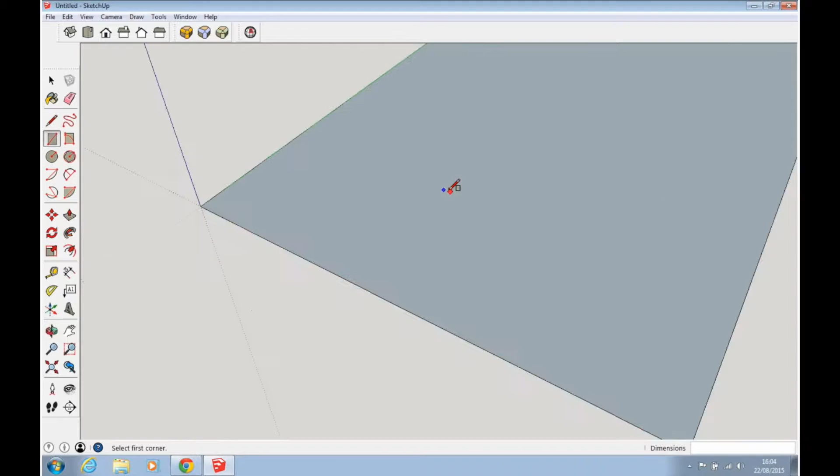I'm going to zoom out, holding down the shift key and using the middle mouse button to pan - scroll wheel, shift, middle mouse, pan. I'm going to scroll right out until I get the profile of the box, and you can see that's going to be 75 millimeters in that dimension and 50 millimeters in that dimension.

Now the base of the box I'm going to make roughly 15 millimeters. To do that, I'm going to choose this tool here, the push-pull tool, and with that face already selected, I'm going to click and drag up.

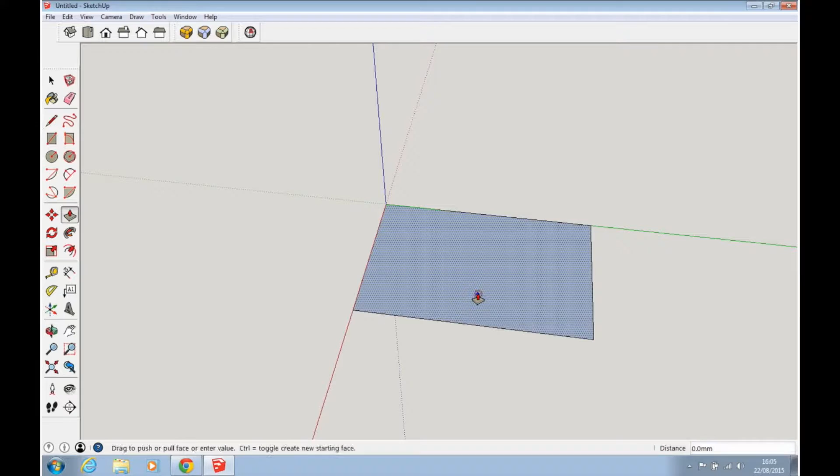I don't have to be too precise here. I can let go and then start typing 15000, and you can see the box snaps to that dimension.

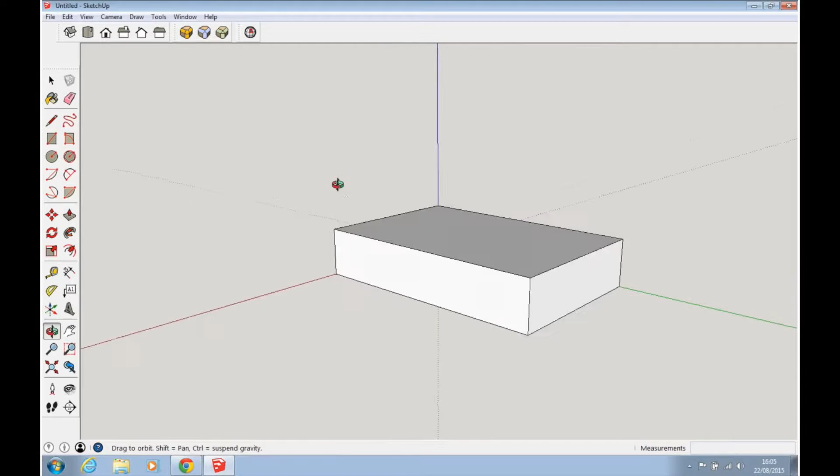Now, I did say we're not going to make just a simple box. What we're going to do is apply some nice curves to it. So the next thing to do is draw some guidelines, because we need precise dimensions for the curves. You don't have to, it's not essential, but I like to do that sort of thing.

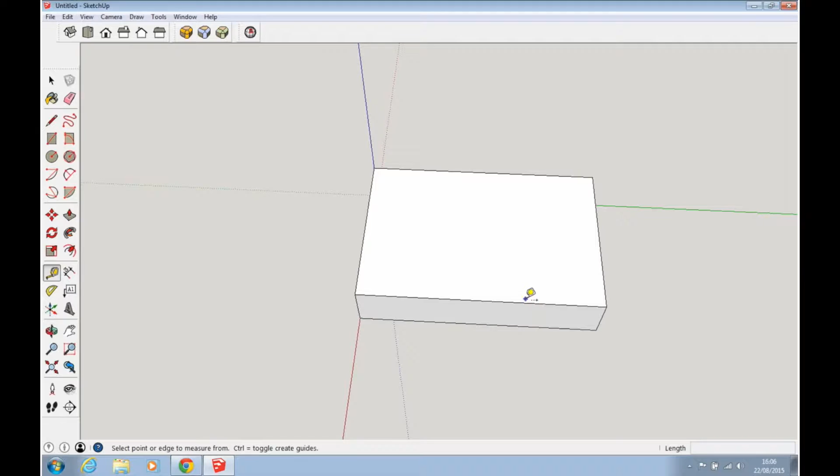So what we're going to do is choose the measurement tool, which is this little tape measure. It doesn't matter which edge I start from, you see the cursor snaps to the edge as I move around here. So I'm going to start at this edge and just drag up.

And again, I'm going to type in a value. It's 1 centimeter is the radius I'm going to use, which is 10,000 units. And you'll see that that snaps there.

Now, actually, that's probably all I need to do to give it a reference point, because all SketchUp needs is a reference point to work from.

I'm going to go to the 2-point arc tool, click on that, and what will happen now is I'll start with this, where this guideline meets the edge, and it tells me there's an intersection there. Now I click once and you'll see automatically this tool paints or draws it in a cyan colour. It's basically saying that it's a tangent to that edge where the red X is.

If I then move on to the opposite edge, that's at 90 degrees, and then move up, you'll see that it snaps and goes magenta. That's basically telling me that's tangent to that edge. I can change that - I don't have to draw a tangent edge, but I think that's what we're going to go for. I'll go for the tangent edge.

So once that's ready, I'm going to click to set it. Another wee interesting fact about this tool is that when you choose to use it, I'm going to come away from it and go back to the pointer. If I choose it again, if you look down at the measurements, it changes to sides.

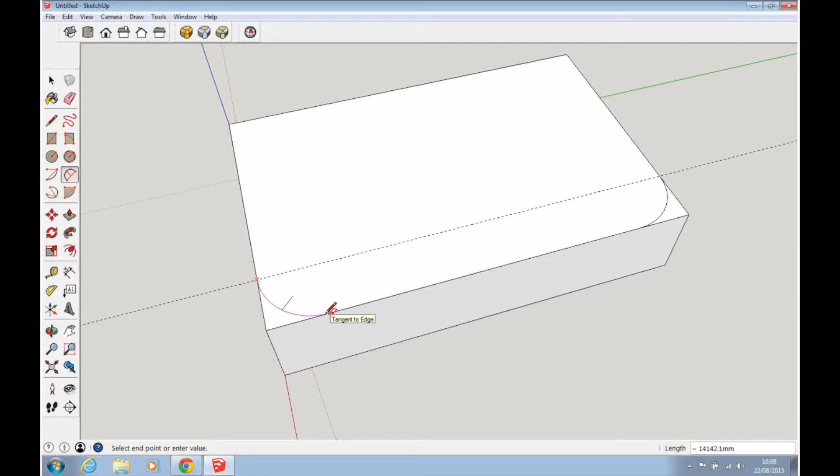So again, I'm going to click where it intersects, drag along, snap at magenta, and then click again. And I've drawn 2 curves. Now I don't have any guidelines set up on the opposite side.

What I can do is use SketchUp's inference engine, so I'm going to use that. You see that the curve tool snaps to the vertex that's created at the tangent. And if I just move along there, you see the dotted line.

Red dotted line means I'm moving along the x-axis. And it'll snap where that meets the other edge, and then I can click with the tool, and it's exactly the same again. It'll snap in.

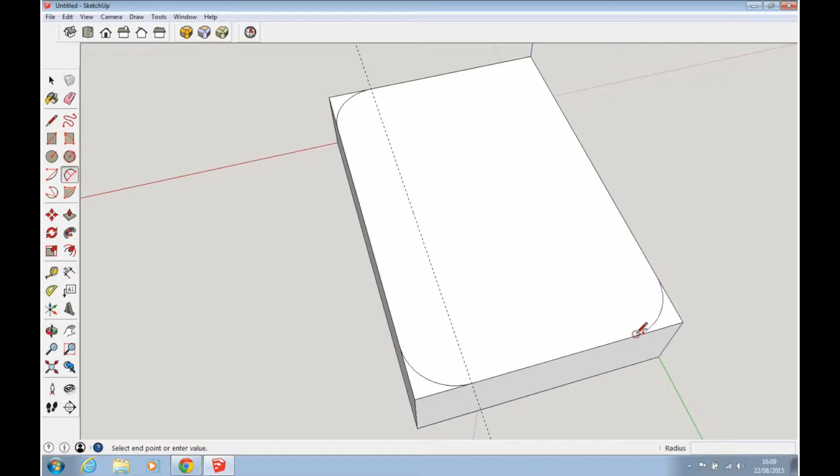Okay, now I'm clicking 3 times. First time to set the start position, second time to set the end position, and the third time to set the arc. I'm going to repeat that trick this side.

So where my cursor is up here, let it hover over that for a moment, and then drag it down. You'll see that it's aligned with the x-axis until it meets that edge there. Click once, click twice, and then click again to set it.

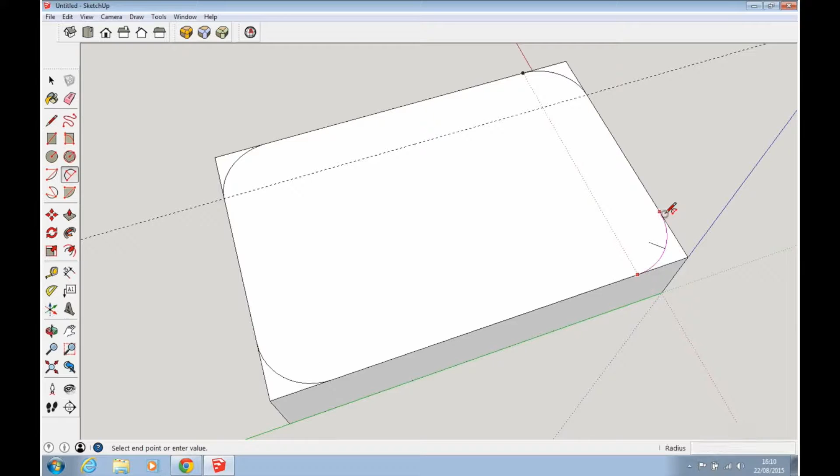Okay, now we've not actually created any curves yet, or curved edges. We've still got these right angle edges. So I'm going to use the push pull tool here. As you see as I use this, it highlights the faces as I move around the object.

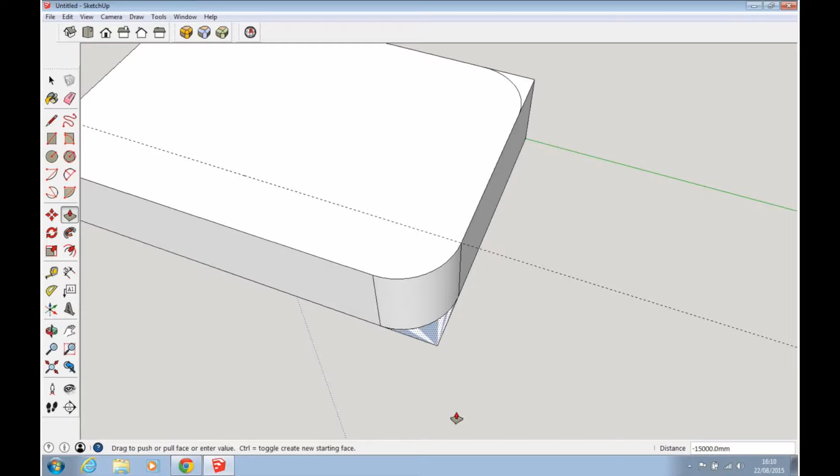I'm going to use it on this face here, because putting that arc in has intersected the rectangular face and created a separate entity. That can be dragged down like so, and it won't go beyond. I can drag further, but it won't go beyond. If I let go of the mouse, it erases that extra face at the bottom.

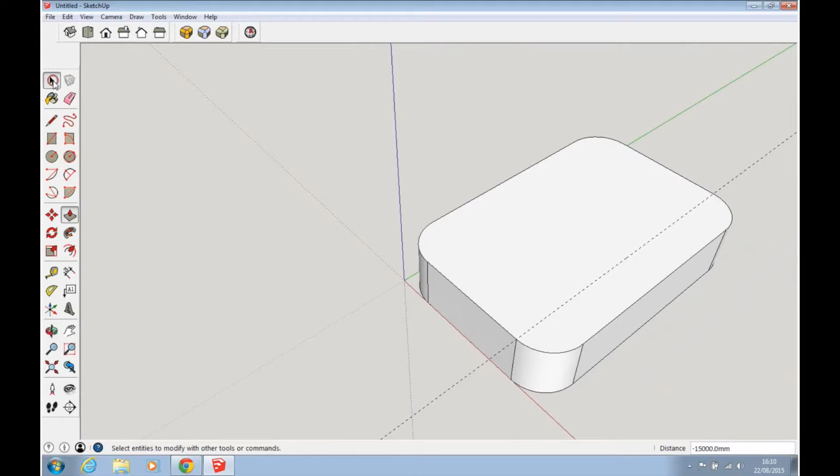And I'm going to do exactly the same here, here, oh, and here. And you can see our box is starting to take shape now. I'm going to do some further refinements to it. But for the moment, I'm quite happy with this shape.

So the next thing I'm going to do is carve out the interior. There's a couple of things we can do here. We're going to need to decide the thickness of the walls of the box.

Now, if you choose to print it in, for example, laser sintered nylon, it goes from very flimsy to quite sturdy in a short space of thickness. So a good thickness I've found is something like 1.8 millimeters. For this size of box, it's probably enough. You don't want to make it too thick. You could make it thicker, but it's going to cost you more at the end of the day.

So 1.8 millimeters. In order to do that, first of all, I'm going to use the eraser tool and just get rid of that guideline. Don't need that anymore. I'm going to click on this top face, and then I'm going to choose the offset tool, which is this here. And the offset tool kind of sticks to the nearest edge on the face that you just selected.

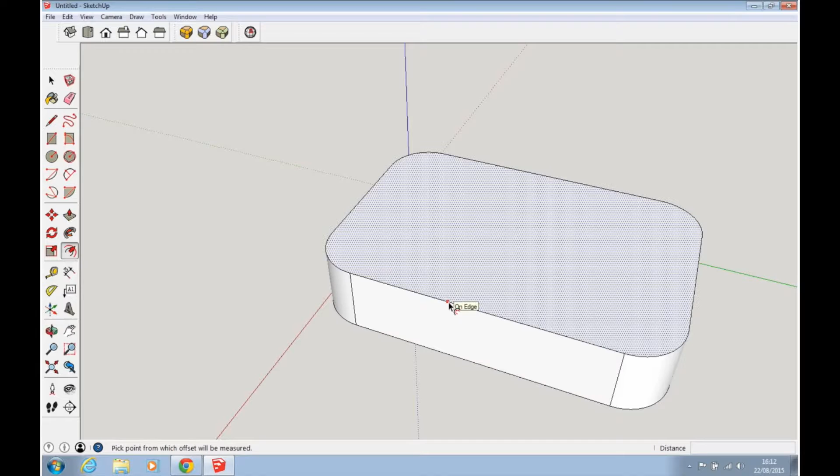I don't have to be too particular about this, but if I click once and start dragging it, I've just clicked, move the mouse in. You can see it follows the contours of the curve quite nicely until it gets a bit screwy as you move in, which is undesirable.

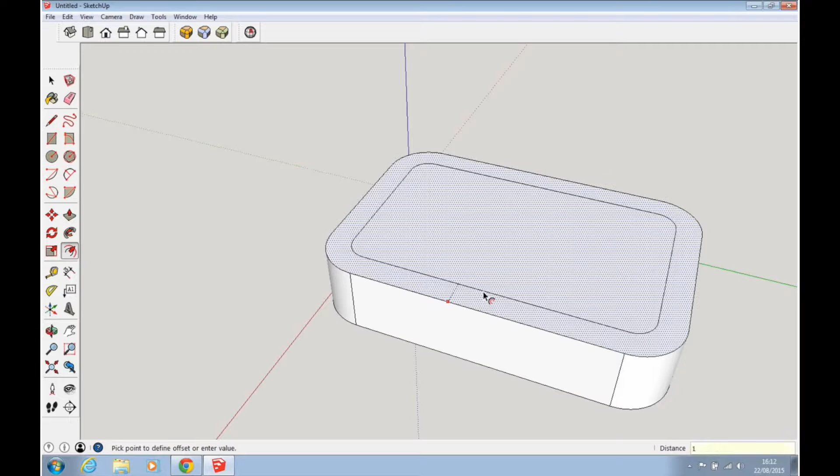However, we're not going to go that far, we just want 1.8 millimeters. So again, I don't have to do anything, I just have to type 1800. Remember, we're multiplying by 1000. Hit return. And we get a nice smooth wall.

Now, how do I make the base 1.8 millimeters? How do I know to make the base? Well, what I'm going to do is draw a guideline, and I'm going to start the guide on the bottom edge, click once, and then pull up, and you'll see that the blue arrow indicates I'm on the Z axis when I'm moving.

The line up and down. And again, I just type 1800 to represent 1.8 millimeters.

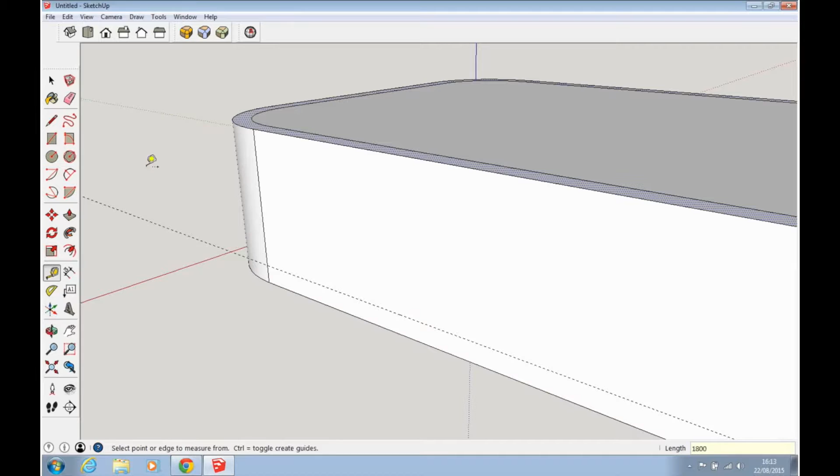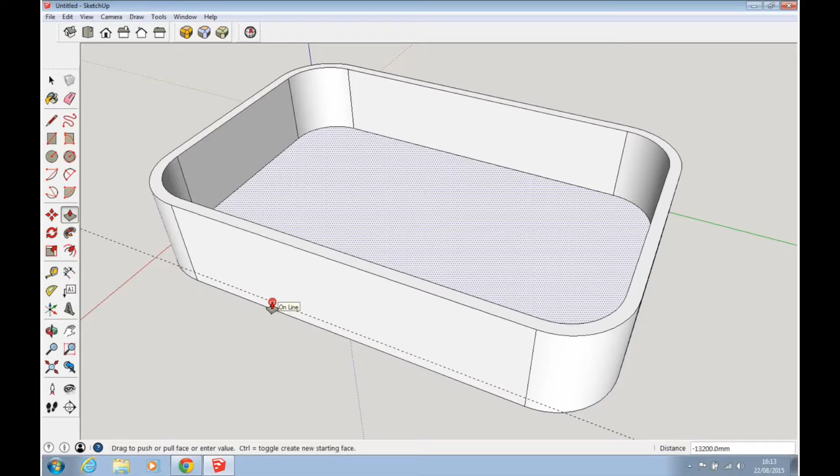Okay, now with that guide in place, all I need to do is select that face, choose the push pull, and then move the face down, and it pushes that in. And then what will happen is if I drag my cursor over the guide, the face will snap to the line, and I know that that face is 1.8 millimeters above that face.

Okay. Use the erase tool to get rid of the guide. Okay. Now, what I'd like to do is...

That's going to produce a box, yes, and it's going to have curved corners, but it'd be really cool if it was curved on the inside. So what we're going to do now is create an inside chamfer.

And the easiest way to do that is just to create some guide geometry inside the inside face. And I think we're going to make the inside chamfer about 1.5 millimeter radius.

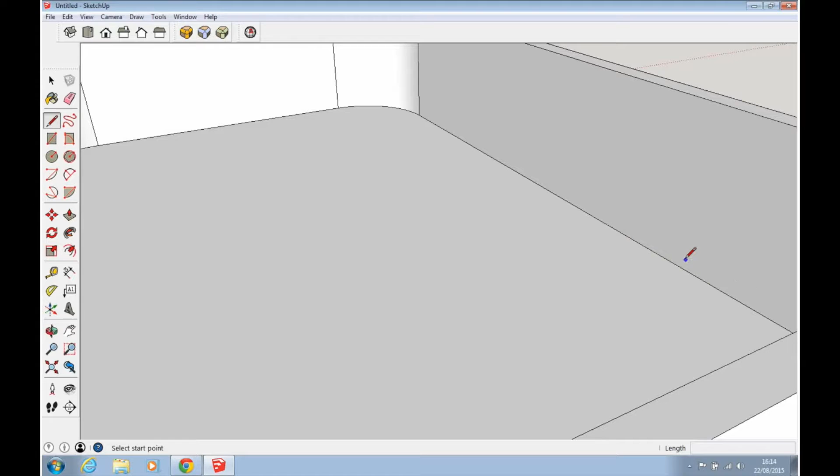So in order to do that, I'm going to choose the pencil tool, and I'm going to click it. It doesn't have to be, it can be anywhere on the line. If you move up the line, you'll see it snaps to the center of the line at some point. There you go, midpoint. So we'll work from the midpoint, and again we'll move up, and again we're going to type 1500 to represent 1.5 millimeters.

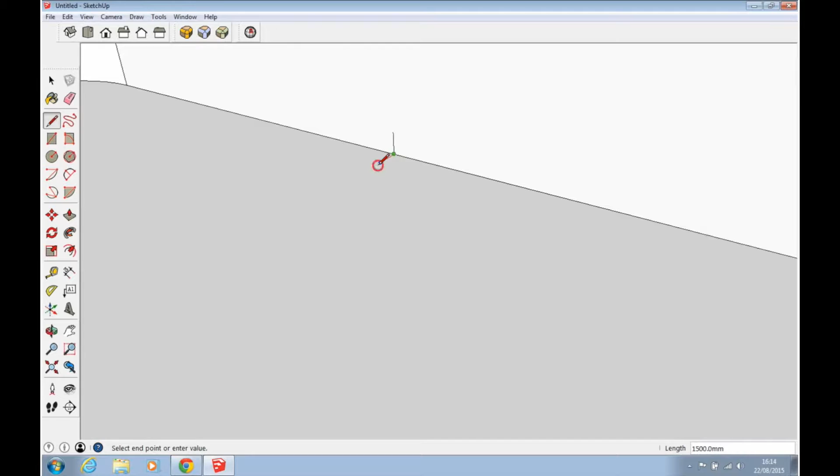So I'm going to move to the bottom of that line, click again, and drag along. You see that SketchUp snaps to 1500 - it knows you're going to use that as the measurement, so it snaps to it. So I don't have to type anything in, just click, then choose the pencil tool. Make sure the line looks right.

That's good. What I'm going to do now is draw another arc, but this time I don't want so many faces on it - just 6 faces, 6 edges, 6 facets. So before I do anything, I'm going to type a 6 in. You'll see that down at the bottom it changes to 6. Hit return, and then I can start drawing my arc.

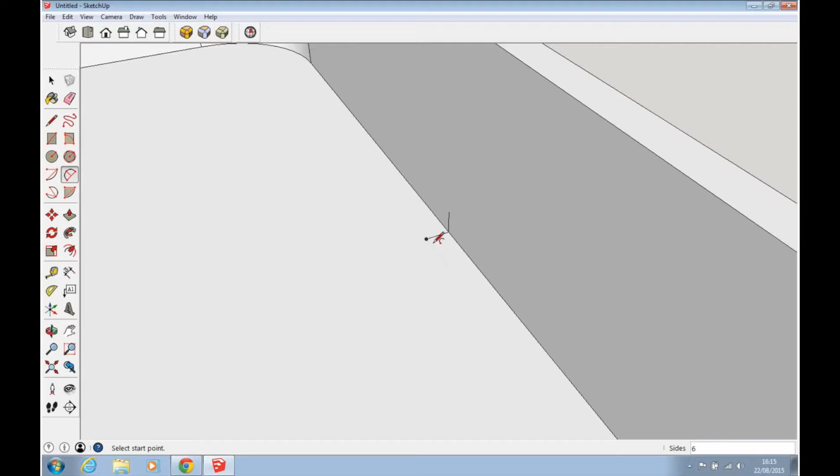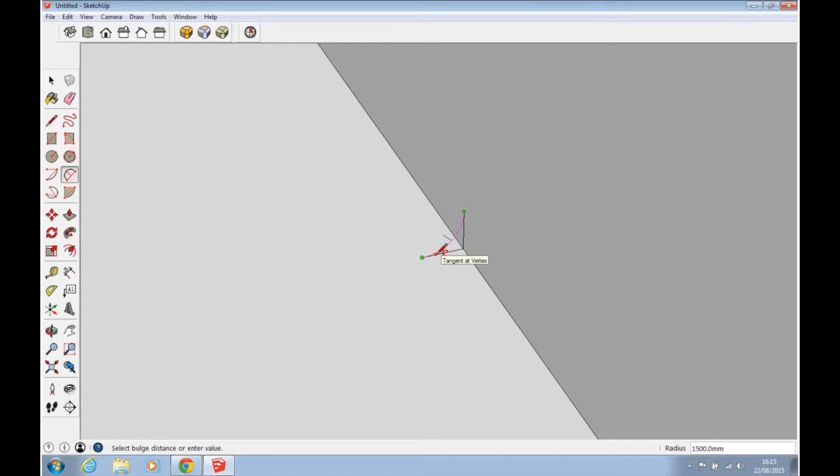So I'm going to choose to draw the start at the top, start to finish at this vertex here, and then drag inwards. You'll see that if I drag in on this bottom edge, it goes magenta to represent tangent, and if I click again, it creates a little face which is the shape of the arc.

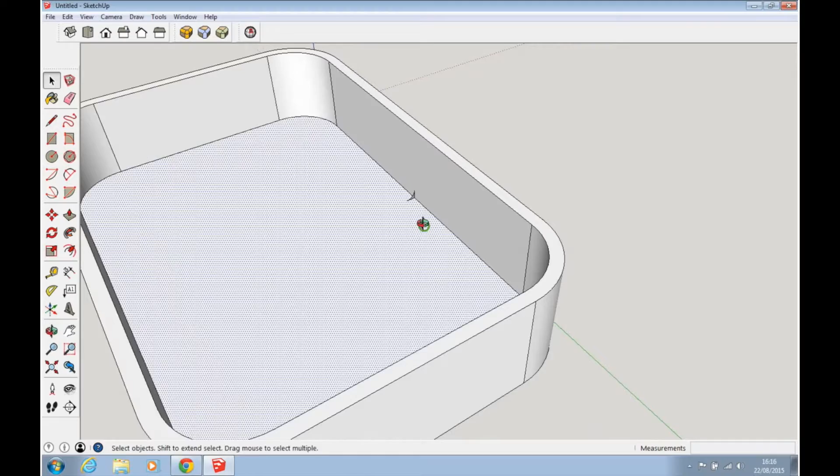Now we can use this to our advantage, because we can select the entire face here - it's the base of the inside of the box. By choosing that face I'm telling SketchUp that I actually want to use the edges when I go to the next tool, and the next tool is going to be the Follow Me tool.

So the Follow Me tool is a bit tricky to get to grips with, but I'm essentially just telling SketchUp beforehand, before I start using the tool, that this is the face I want to work with.

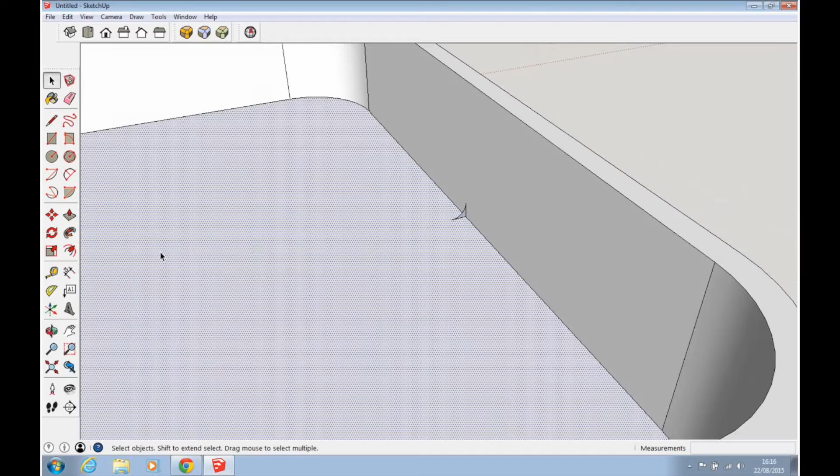So after I click this, I need to choose a profile. Well, I've just created the profile, and the profile is this profile here. So if I zoom in on that and then click, it creates a nice chamfered edge, and it follows the curves around in the inside, which is really nice.

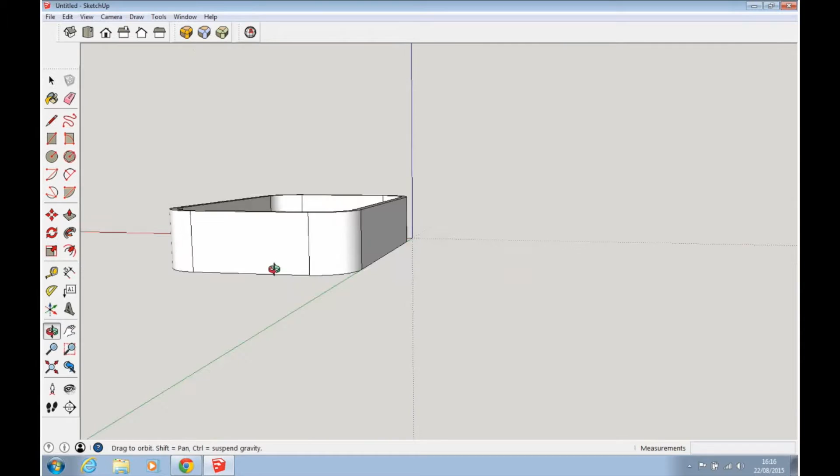Now, what I'd like to do is do the same on the outside. However, that does present us with a little problem - we can't actually see any rectangular faces to draw from.

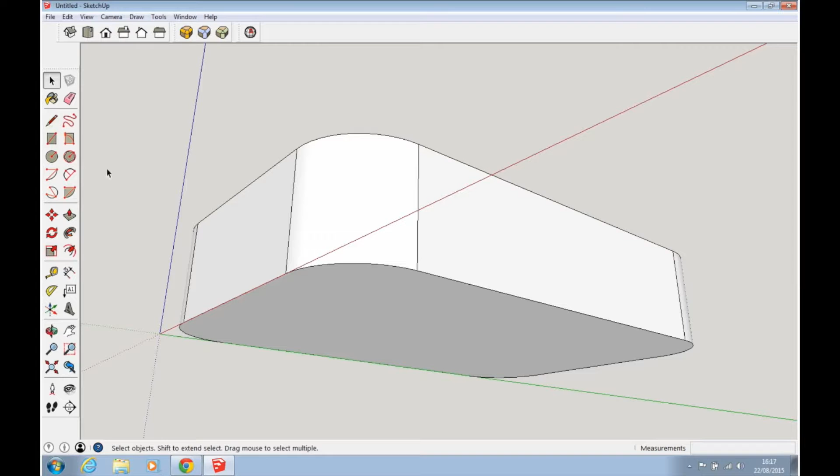But what I can do is pull a similar trick. So if we want a continuous 1.8mm thickness on the radius, then we need to add 1.5 to 1.8 to arrive at a new radius. So that would be 3.3. So I'm going to put a 3.3mm radius on the outside of the box here.

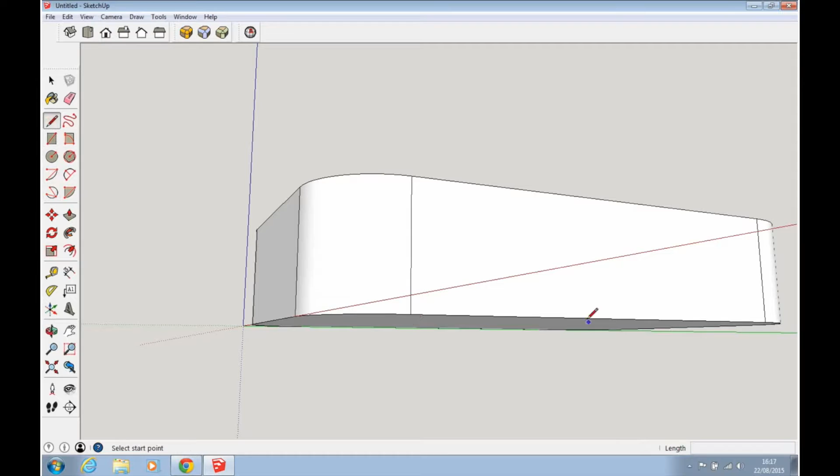So in order to do that, we're going to use this tool again - pencil tool, midpoint, and then draw up. I'm not drawing this, it snaps to 1500. Well, we're not going to do that. We're going to add on 1.8m to that, so I'm just going to type in the value, which is 3300, and it draws a line up there.

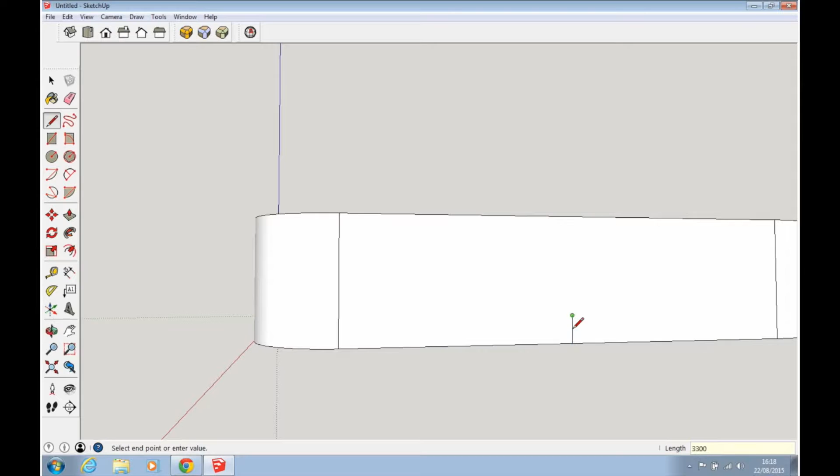Now the pencil tool is still attached here. Well, that's not good to me, so I'm going to press escape to detach that, and then start again at the bottom, and draw along the x-axis, the red axis, the same again - and there it has snapped to 3300 units there. Now again, got this line, escape to get rid of that.

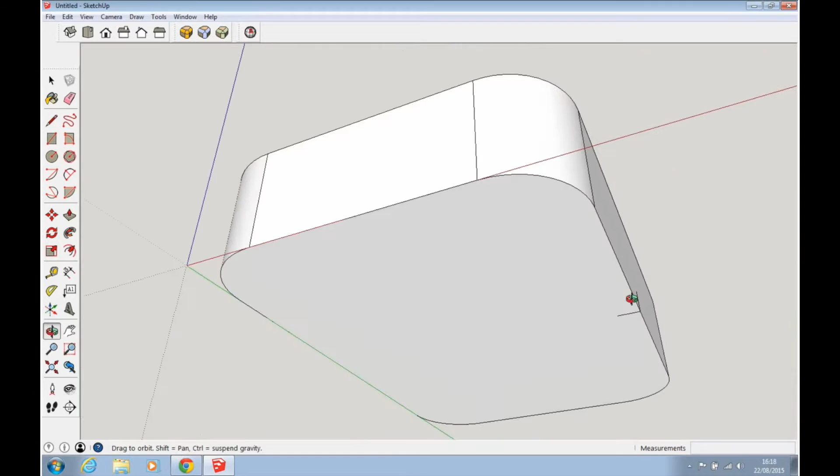Now that's all very well and good, but how am I going to draw an arc on the inside of the box? There's a couple of ways of approaching this. You can switch view to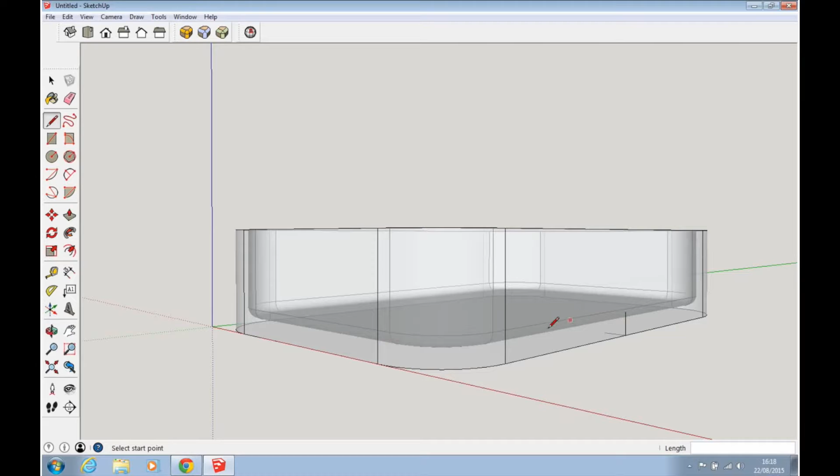X-ray and tackle it from there. Problem with X-ray mode is sometimes you have competing geometry in the background which the cursor will snap to, which can be annoying. But in this case, we should be clear - it's a nice clear space there with nothing there. That's just the bottom face that we're looking at.

So what I could probably do with X-ray mode enabled is repeat that exercise with the curve, and draw an arc again. Do I want to make it 6 or leave it 12? I'm going to leave it 12 because it's actually quite a decent arc, this - I'm going to leave it at 12 sides. So you can see the size - if it's not set to 12, you can just type a 12 in, hit return.

And then I'm going to draw the arc. Doesn't matter where I start from - I'll start from the bottom, and draw the arc up here. Now it knows I want to do the tangent there. Now it's created a face on the inside of the box.

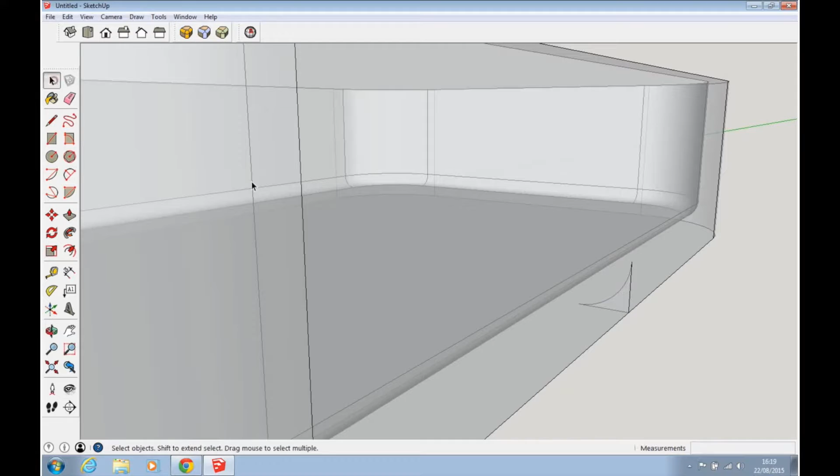Now to prove that's still on the inside, if we use view, face style, take X-ray off, you'll see that nothing's changed. We've still got our two guidelines on the outside there.

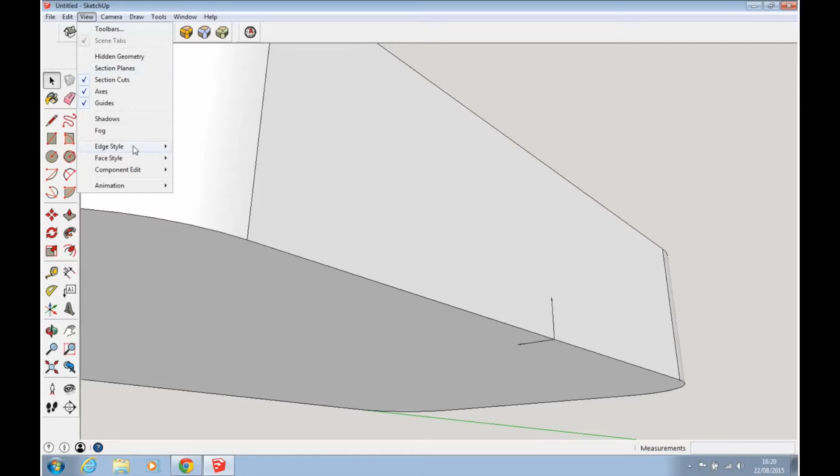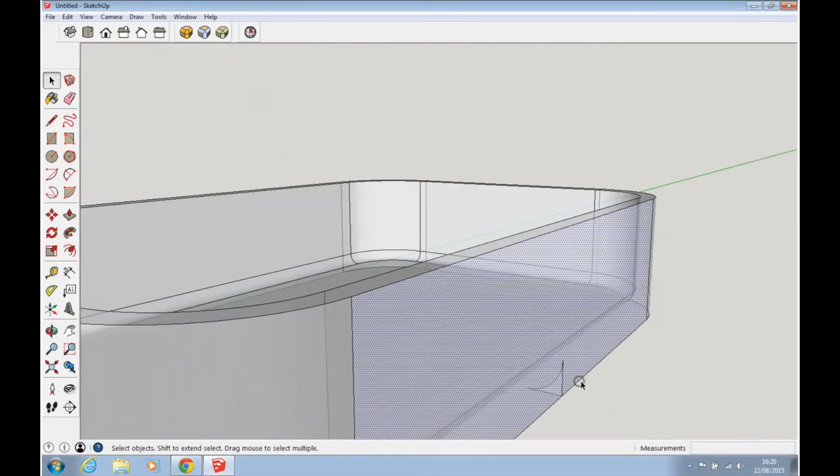So what I'm going to do is go back to view, face style, X-ray. This is possibly going to get a little tricky here because I need to select that face in order to execute the follow me, but that face is actually sitting behind, on the interior, so this presents a little problem. So how can we get around this? Well, what I'll do is switch off this X-ray mode just for the meantime.

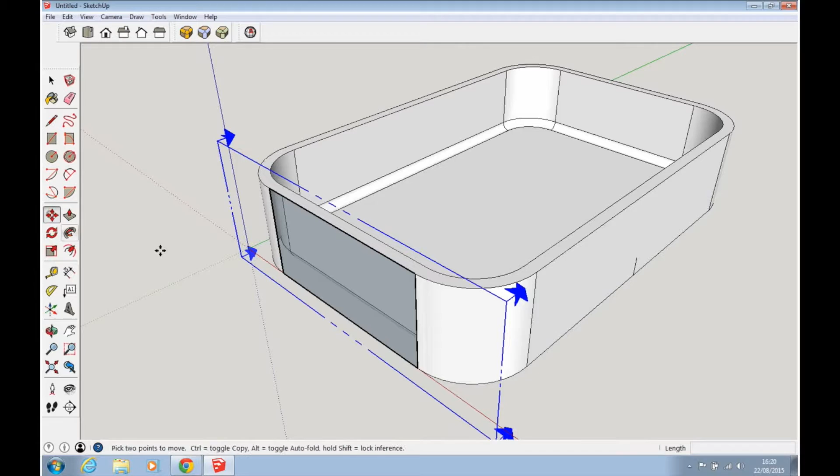Face style, X-ray, take that off. I'm going to utilize section cuts. So if I use the section cut tool on this face here, the section cut aligns itself with the face you choose. Then I need to pick it first so that it's blue, and use this move tool, and just move the section cut up to the area just ahead of where that face is.

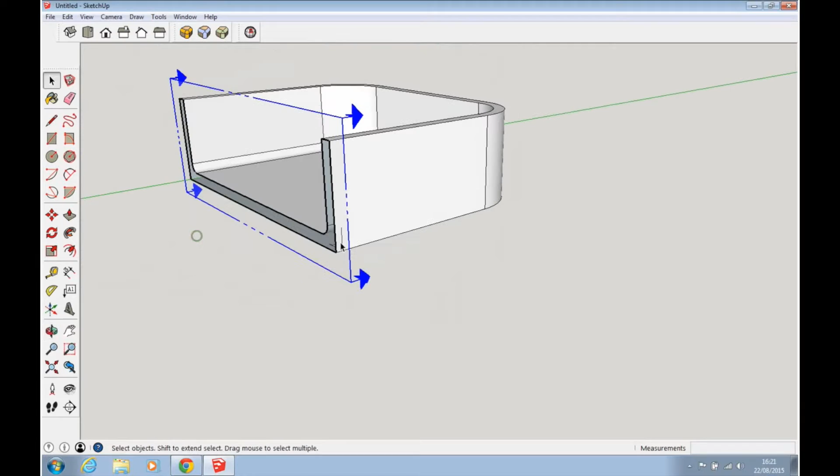There. And you can see that interior face that I created there, and it quite nicely follows the profile of the inside curve. However, we've still got to get rid of this right angle here, so I'm going to put this chamfer in, or the bevel if you want to call it that.

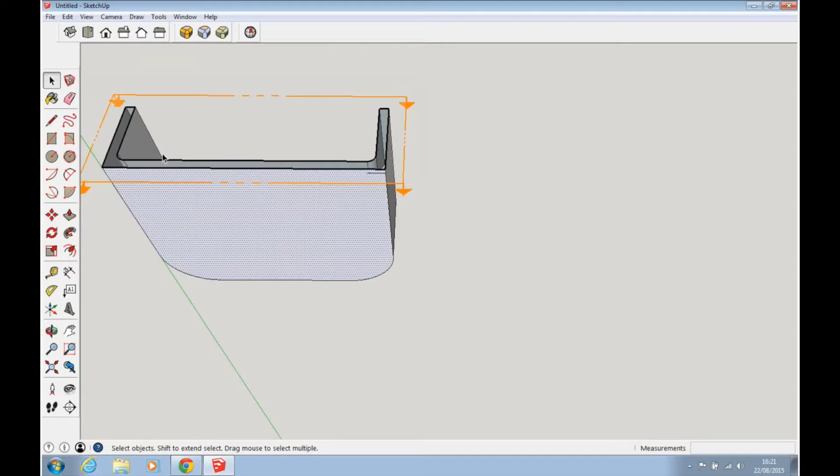And the way to do that is select the base, which is this plane. Remember, the section cut is only showing us half the model, but the entire base would be selected. Then what we're going to do is, with that selected, use the follow me tool. With the follow me tool selected, I'm going to choose this face here, and you'll see that disappears, and it creates a nice smooth profile around the base of the box.

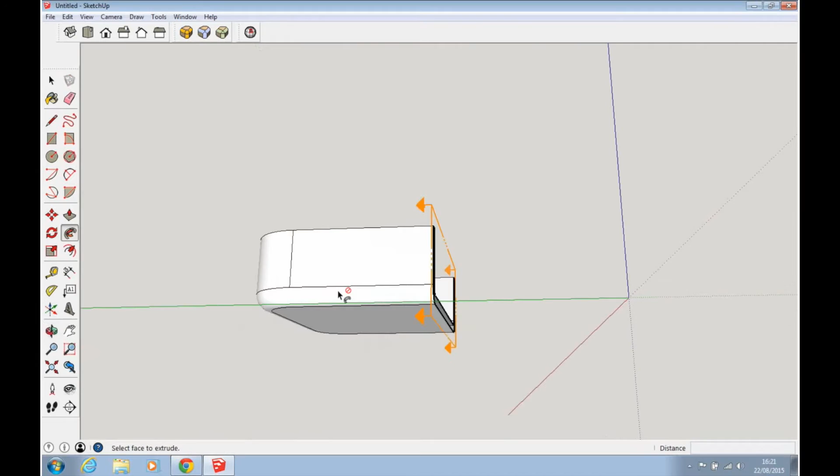And if you look at it with the section cut enabled, you can see that we've got this nice 1.8mm thickness all the way around, which is really nice.

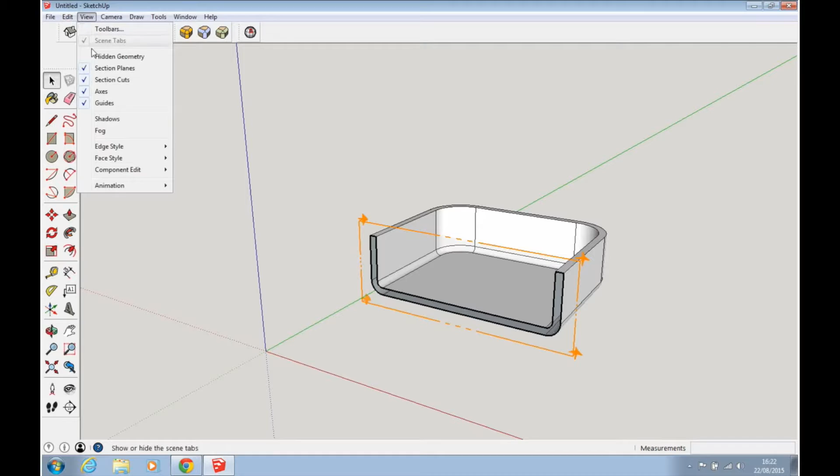What I'm going to do now is go into the view menu, take off the section plane, take off the section cuts, so we can view the whole entity. And that's actually turned out quite nice.

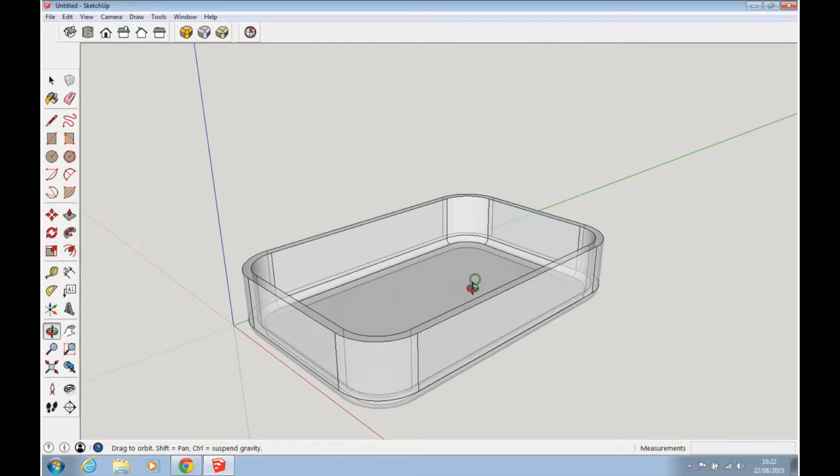We can switch to, what I'd like to do is just switch to the X-ray mode again. X-ray is really good because it lets you have a quick look to see if there's any extraneous geometry inside the walls of your creation, and that's helpful because although the Shapeways systems will usually eliminate that, they can lend to problems, unforeseen problems, and leave you scratching your head sometimes.

Okay, that looks good. So we're going to go back to solid view. Then what I'm going to do is create the lid. Now the lid's exactly the same as the base, only the lid's going to be a little shorter.

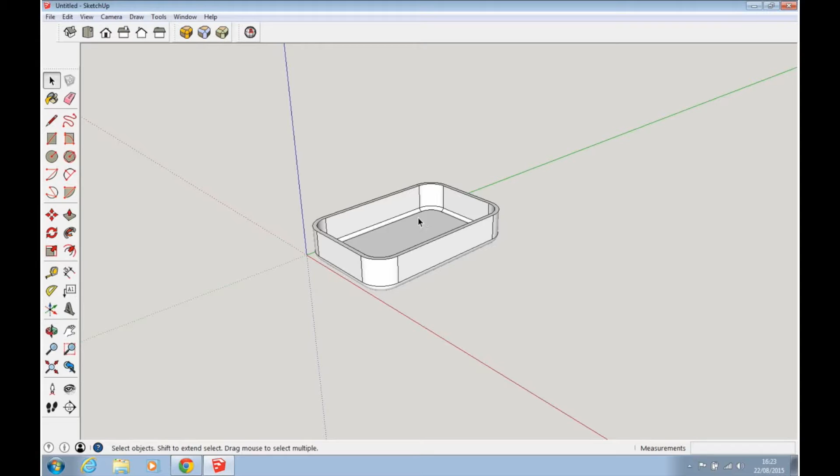So rather than have to go through all that again, what I'm going to do is triple click 1, 2, 3 to select the entire thing. I'm going to use the move command, and I'm going to select a point.

Now the move command needs a reference point. The reference point can be outside the model or it can be inside the model. For the sake of getting this done, I'm just going to choose a reference point, which will be this vertex here. As soon as I start dragging, it'll move along and kind of stick to the x-axis, or actually it'll stick to any axis I choose. But in this case, it's going to go to the x-axis, but that's not good.

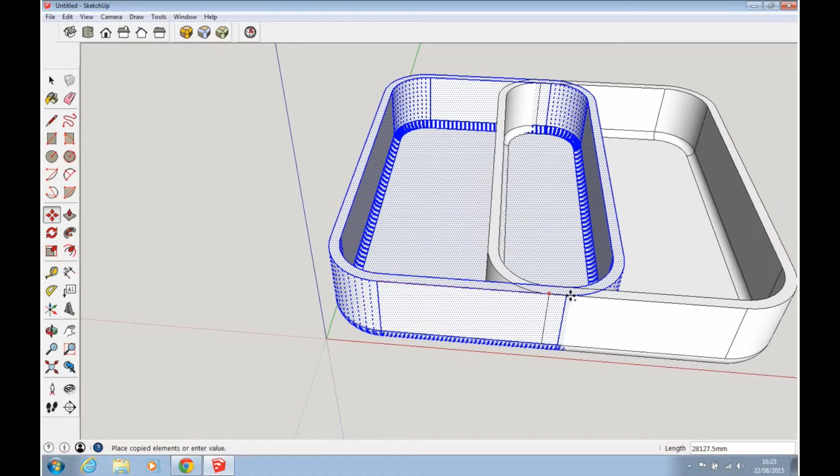So why would I want to do that? Why did I want to move it? Well, I don't want to move it, I want to create a copy. So in order to create a copy, I can press the Control key once, and it's created a copy. Now, while that's still in the move, I can use my keys just to move the scene around, just to get where I want to be. And then I'm just going to click to fix that, and I've created a copy.

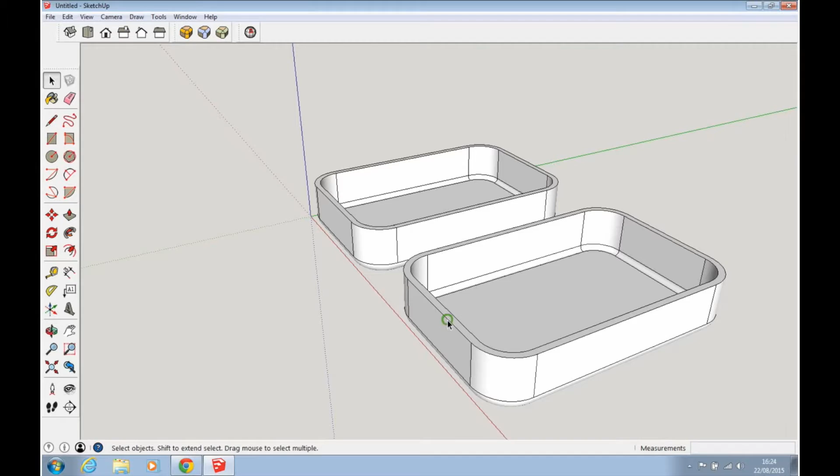Okay, now the lid, I actually only want to make it 1 centimeter tall. Now if you remember, we made this lid, I can't actually remember, so I'm going to use the measurement tool to figure out exactly how tall this is. So, it's 1.5 centimeters.

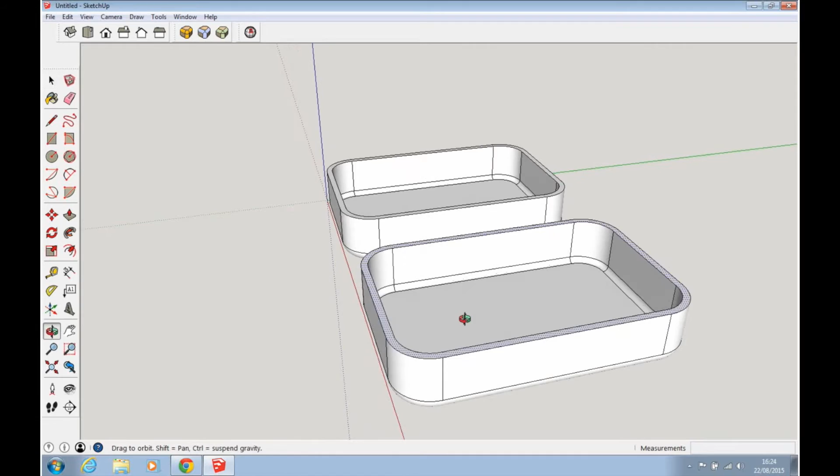So I want the lid to be 1 centimeter tall. I'm going to take this top part, select that face that forms the rim at the top, and use the push-pull tool. With that selected, I can drag down. I don't have to be terribly precise, but I'll need to drag down 0.5 centimeter, which is 5,000 units, like so. And I have created a lid for the box.

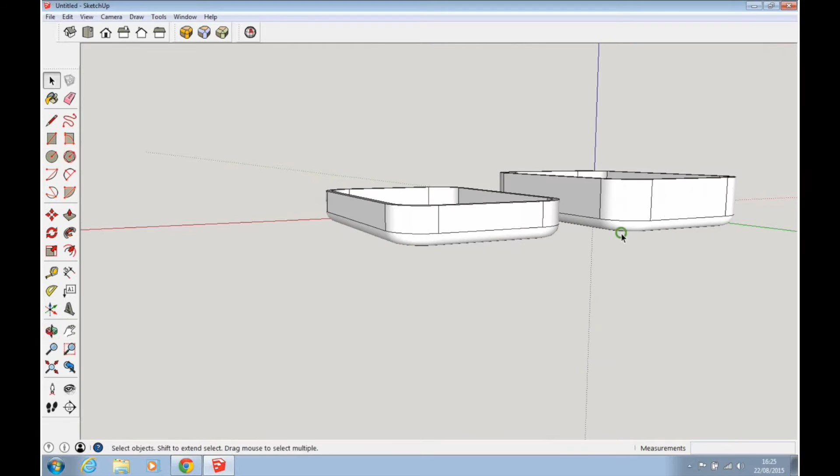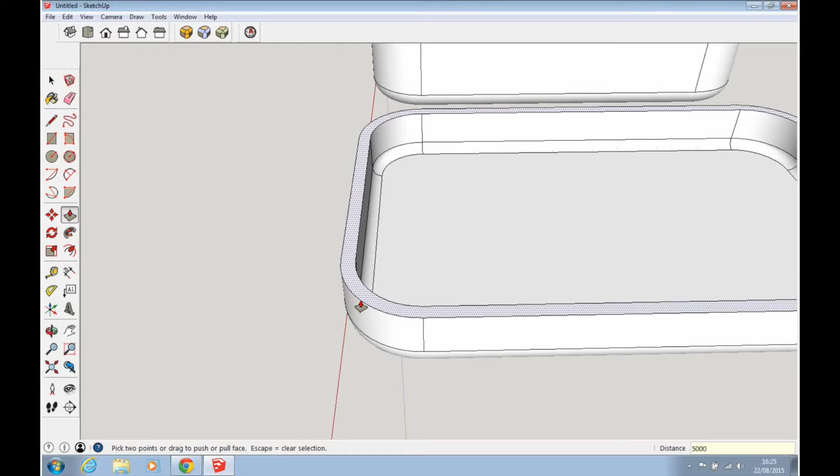You could be more aggressive and make the lid a lot slimmer if you wanted to. In fact, why don't we do that? We just select that face again, and then take it down another 500, 5,000, which is 5 millimeters, remember, times 1,000. So that's quite severe now. That lid is just simply a lid, isn't it?

Not to worry, we shall work with that. So what I'm going to do now is, if you can imagine this box, it's just going to be flipped over. The lid's going to be flipped over. It's just going to slide straight off this. We need to create a little rebate on both entities here. It's pretty straightforward. I'm going to create it first on this.

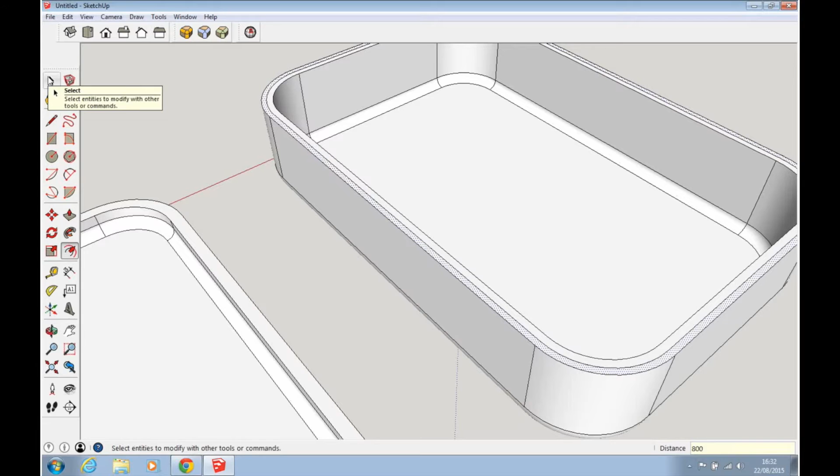I want to make it from the outside. Oops, sorry, wrong tool. I need to click that face and then choose the offset tool. I'm going to offset that by 0.8 of a mil. And I'm going to do the same on this, on the lid, and offset that by 1 millimeter.

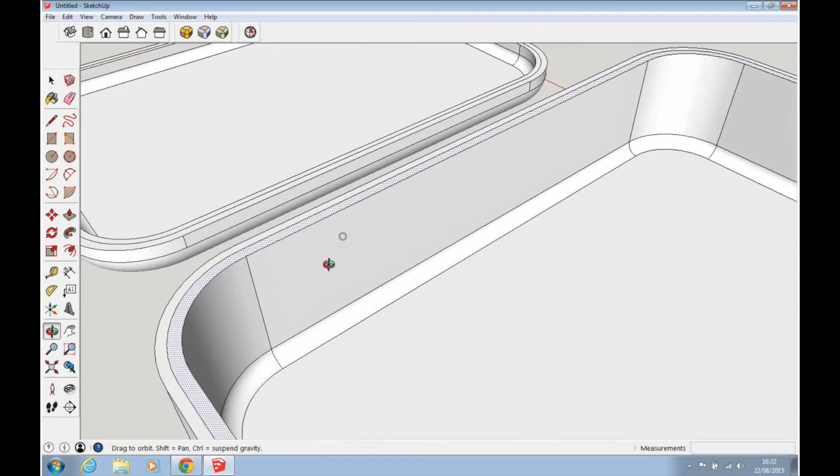And then I'm going to take that face, the one on the outside, use the push-pull tool and drag it down. I'm going to key in 1000 for 1 millimeter. Oops. And then I'm going to rotate around and do the same for the corresponding inside edge. Is that one there? I'm going to raise that up 800, which is 0.8.

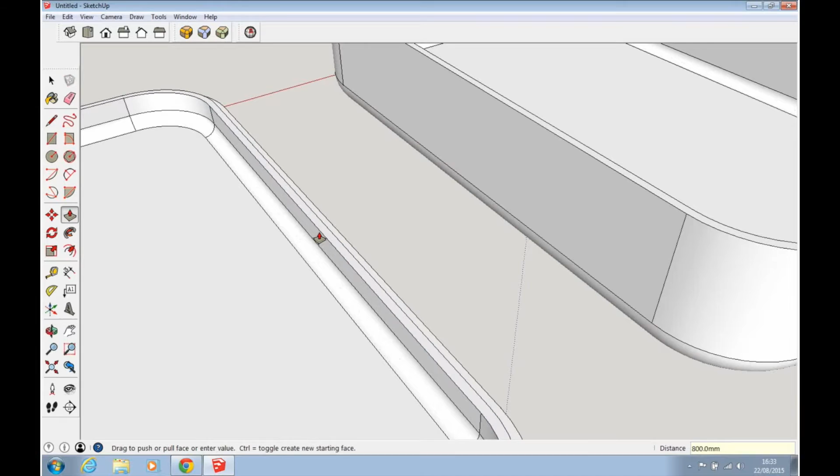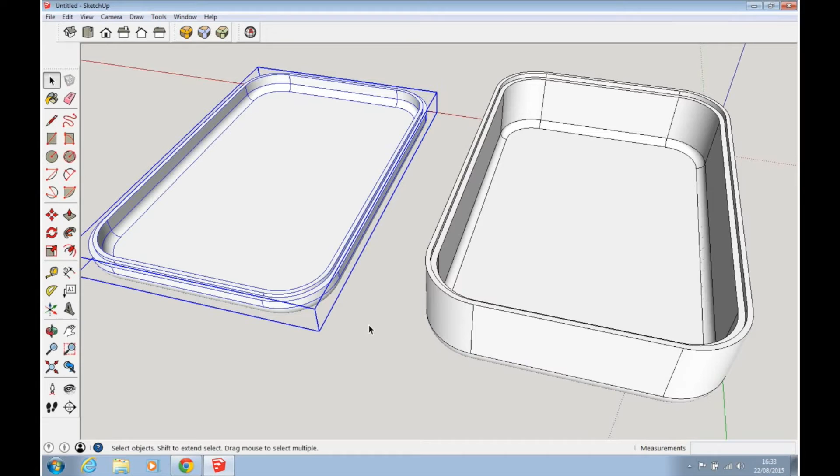And I'm just going to do a test fit of these components to make sure that they seat in properly. So to do that, triple click, 1, 2, 3, and then G to group. Triple click, and then G, enter. I'm not too concerned about giving the components names right now, it's not that complicated a model.

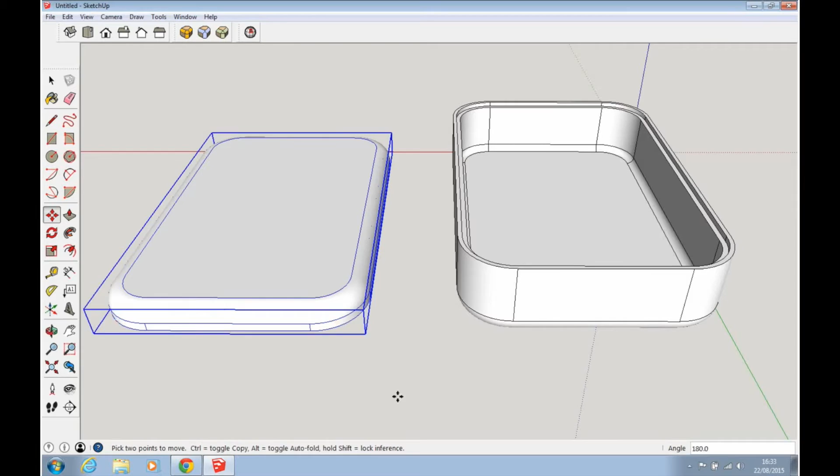Once they're components, you've got this handy feature. If you use the move tool, you can then just flip the object over, because as soon as I land the cursor on one of these crosshairs, it reverts to the rotate tool, which is really handy. So I can rotate that round 180 degrees. And then with the move tool still selected, choose a point of reference. The point of reference is going to be this vertex here, because I happen to know there's a corresponding vertex here. If I leave it there, you'll see that we have got a completed box, which is really nice.

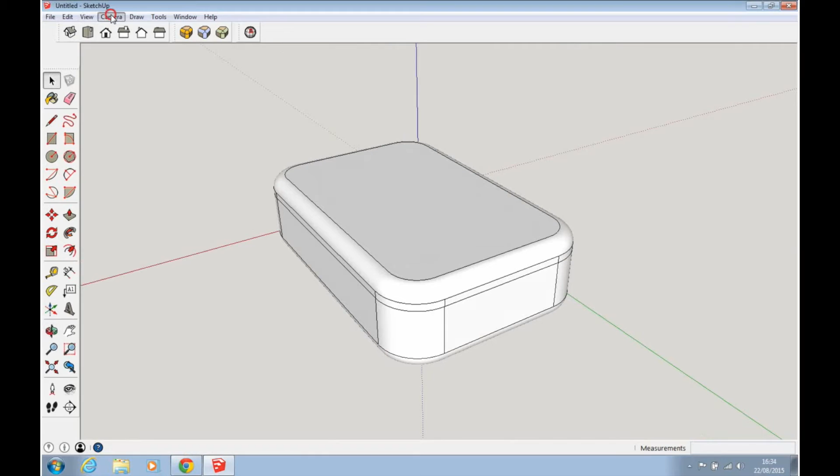And just to prove that it is actually working properly, we'll go to X-ray mode, choose the top, choose the lid, and you'll see the lid is sitting inside the base, and likewise the base is holding onto the lid.

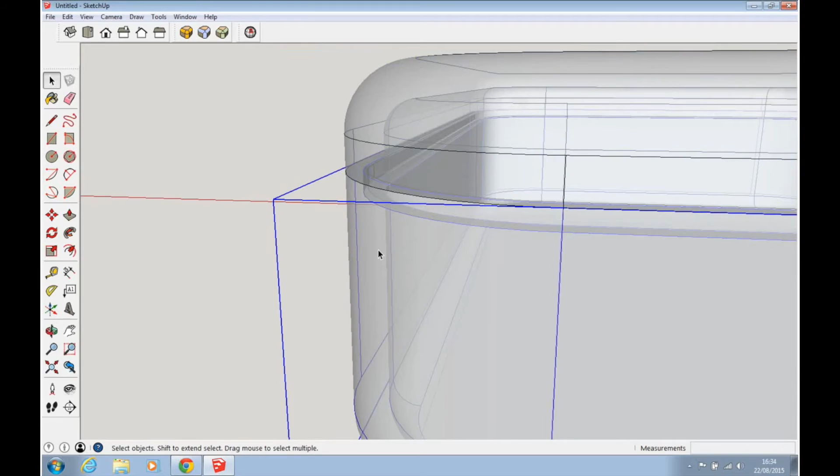Now the reason for putting 0.2 of a mil between these components is really just to allow for the difference in the tolerances between outer and inner walls when you come to the 3D print. It's not a pure science. It will be largely accurate, but not that accurate that you can ensure components with a hole measuring X amount are going to accept other components with a dimension which is also X amount. That's not going to work. So you have to allow a little bit of tolerance there. In this case I've allowed 0.2 of a millimeter between things.

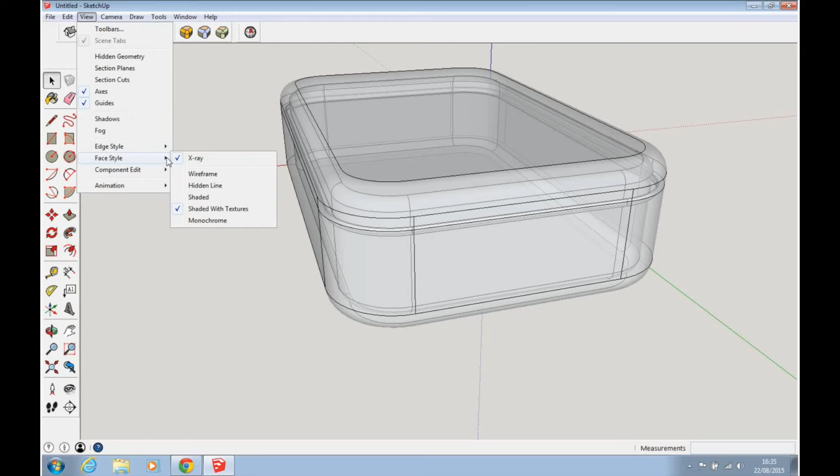So I'm going to switch off the view. Now we couldn't get this 3D printed as it stands. We need to separate the parts up. So I'm just going to use Control Z to move these around. Now the model as it stands is now ready for 3D printing.

So what we're going to do is file save, and we're just going to call it my 3D printed box. Save.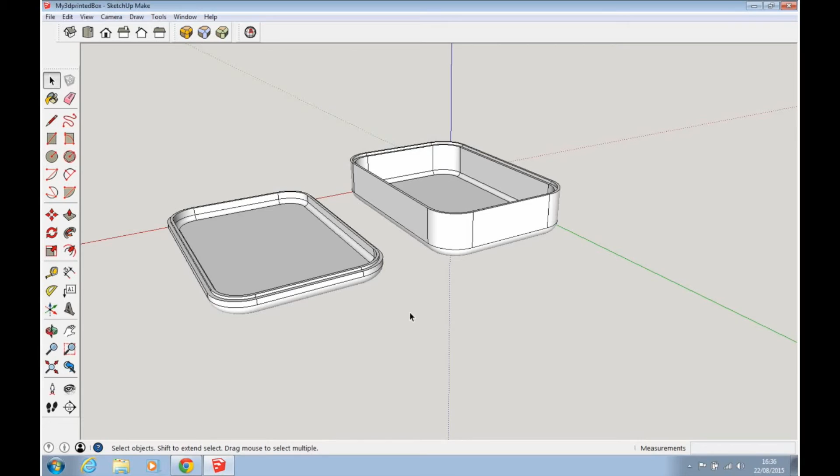Okay, so now we're going to export the model to 3D format that Shapeways can understand. I'm going to go File, Export 3D Model. I'll keep the name the same as the Save As name, my 3D printed box. And the export type will be a Collada file.

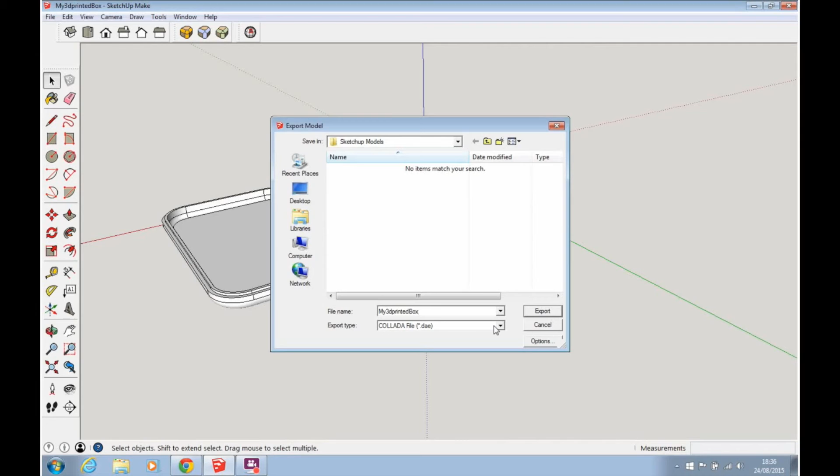This is kind of the default export format that SketchUp uses, and conveniently it's a format Shapeways can understand too. So I just hit export, and it's very quick because it's not a particularly complicated model.

I'm going to go over to the web browser now. I've got Shapeways already open. I've already got an account set up with Shapeways, so if you want to upload, you'll need to create an account. It's very straightforward. Once you've created your account, you can go straight into the Make tab from the main menu.

This by default is listing the models I've already got, but all we want to do is upload a model, and the upload button's here. Very straightforward. We're going to select the file we just created, so select File, click into the correct folder, SketchUp Models, then choose the .dae file, not the SketchUp file, and open that.

I'm going to keep the units in millimeters. Now we were using a huge scale before, almost a meter scale. It was a meter scale, but we're not going to choose meters, we're going to choose millimeters. Shapeways' systems will see that it's oversized and act accordingly, and scale it down to the right dimensions.

And we're just going to do upload. Now it's a relatively simple model, it'll only take a few seconds to upload. And then what we get presented with is a 3D representation of the box. I'm using my scroll wheel on the mouse and just clicking and dragging to move this around, and it's actually looking pretty good.